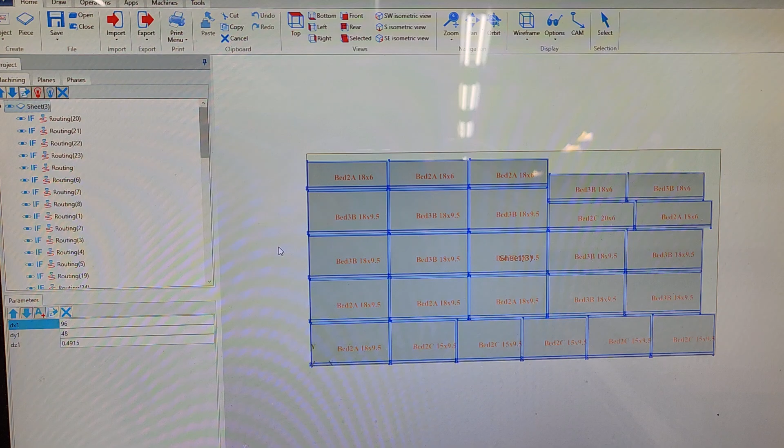Alright, now I will show how to do nesting through Maestro files. This is an example of a nest that I've already made.

So you want to go up here to projects and hit nesting. I don't care to save this, so it'll bring you to this. Now, the way that I know how to do this, there's kind of a lot of steps that are skipped because Brian actually pre-programmed a lot of these things.

But first of all, you have your spoil board thickness. I'm just for now going to show the things that I directly worry about when I'm making these. So you want to put in your spoil board thickness, whatever it may be - it's 0.762. And down here to next.

Here you're going to be talking about your sheet size. Obviously your length, width. Set this thickness to whatever the thickness of all your parts that you're going to be making is. So ours was 0.73, we'll make it that.

This here is how many sheets that you are able to use for this. Now I typically will just put in some large number so that it'll just show me how many sheets I'll need in total. Vertex, low left, that's just starting, your 0 point where the axes are.

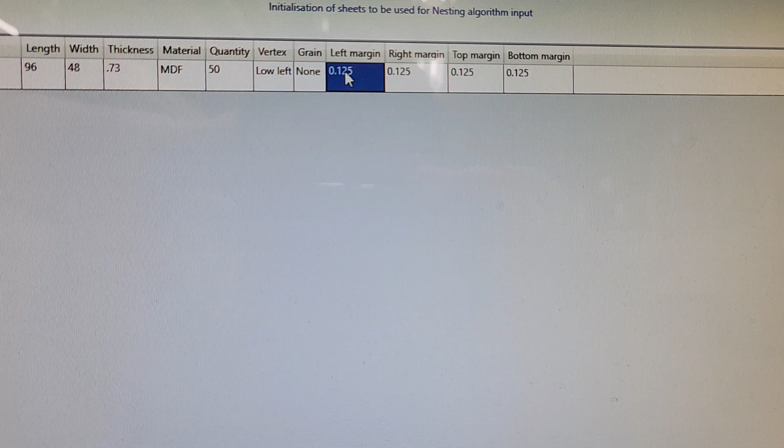This shows how much space you want to have between all of these, the left, the right. And I typically leave this at 1/8.

This is basically the same thing as when you're loading a program in Maestro Active, and you do your X and Y offsets. But this just means that the parts that are being nested will be no closer to the edge - their edge will be no closer to the edge of the sheet than this. So you want to do that. And as far as I know, the material, it doesn't really matter.

Now I hit next again. Go back. Hit next. So now here's where you will actually load the parts.

So, well, I'm actually going to go back because I know that some parts that I was loading were 0.461 in thickness. So I'm just going to put that in for the sake of example.

So you want to go down here and click Programs. And you can either individually just check parts that you made. These were drawer box parts that I made. Well, actually, these are individual nests.

Let me go to bed 2A and into my maple drawer parts folder. So you can select any of these, or you can select and hold the shift key and click the bottom one, and it will highlight all of those parts. So clicking the shift key, I'm hitting the bottom file, and now they're all in there.

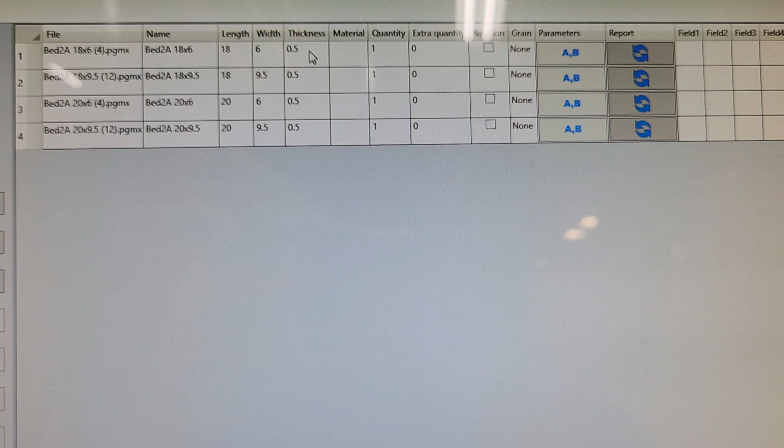Now see, these I actually have at 0.5 thickness, and it's not going to like that because my sheet was 0.461. So I'm going to make all of these 0.461.

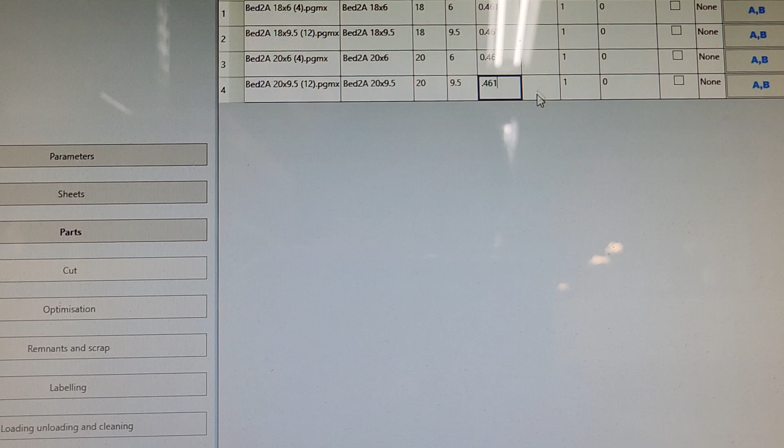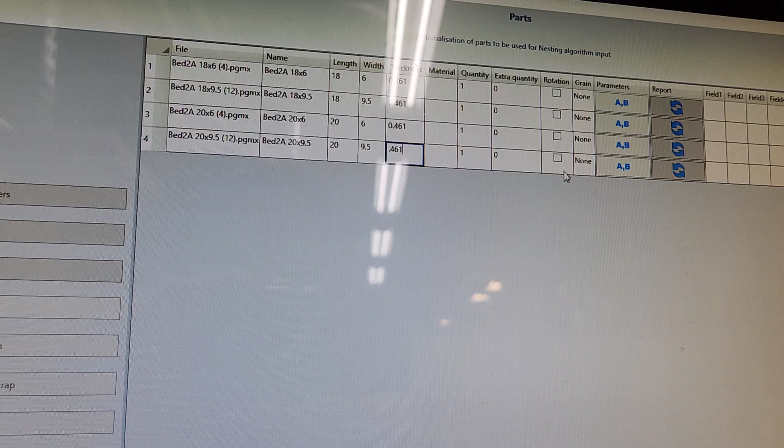Now these were maple, so they have a grain to them. And so I don't want to do this, but if I was using, say, melamine, where it didn't matter the grain direction, I could hit this rotate checkbox, and that would allow the piece to rotate any way that it needs to take up space most efficiently.

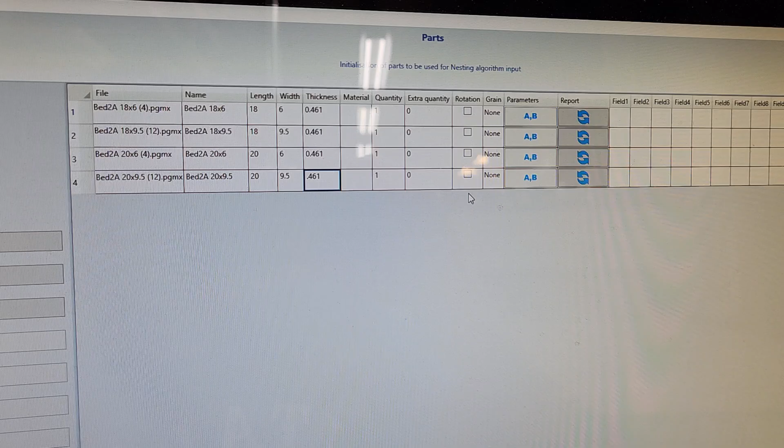But most of the time we'll be working with things with a grain, and when you're programming in Maestro CNC, the grain is typically kept as the X direction. So whatever your long side that you want grain to be along is, you'll make that the X direction.

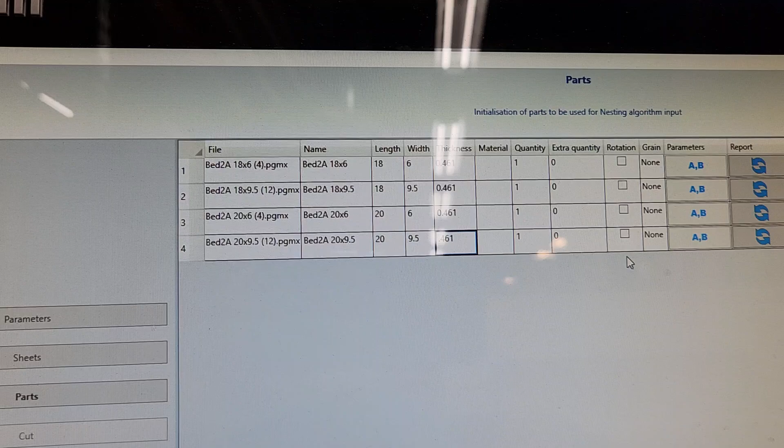So now that this is done, this is what I was talking about, where you can kind of just click next a bunch of times right now, and I'm going through all of these different menus, and I've always gotten by without having to edit any of this. Here we are back at our actual parts list.

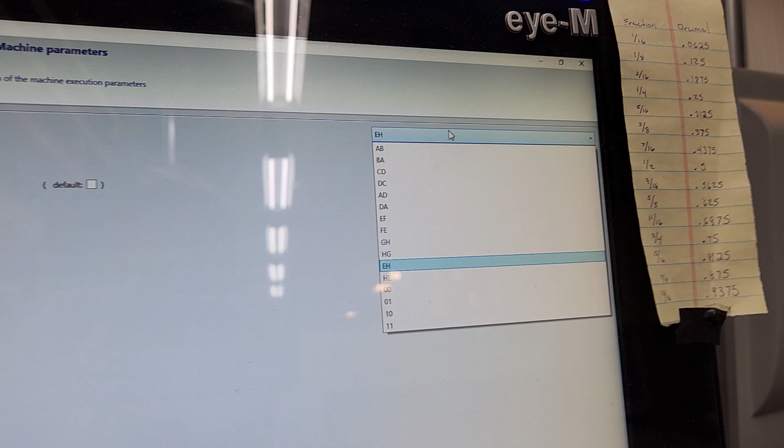Here you can change your work area like we saw in Maestro Active. You'll remember that it came up as HG, but EH will use the entire, basically the entire vacuum table. You can also access the settings such as changing from vacuum devices to a different type of locking.

I unfortunately had to turn the dust collector back on. So that's what that noise was.

But then you just click next until it's grayed out, and then you can hit end. And it will tell you here, oh, this reminds me.

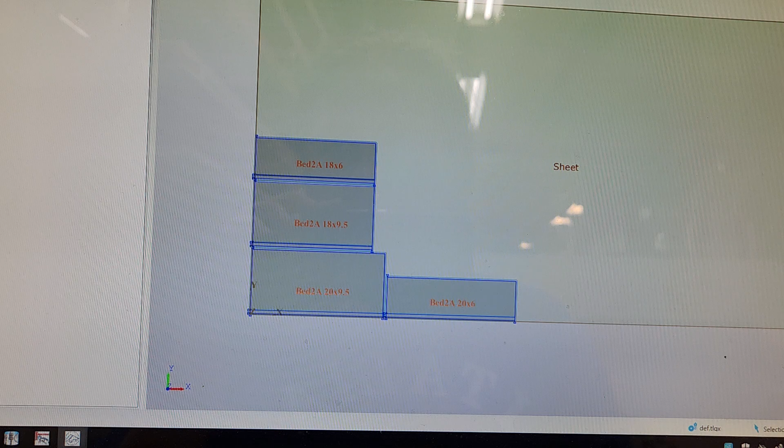Let's do all that again. Go back up to nesting.

And what's nice is that if you have to redo a nest, if you do it again within your same nest file, it will retain everything. So as you can see, our spoil board thickness is still there, and the sheet changes we made are still there.

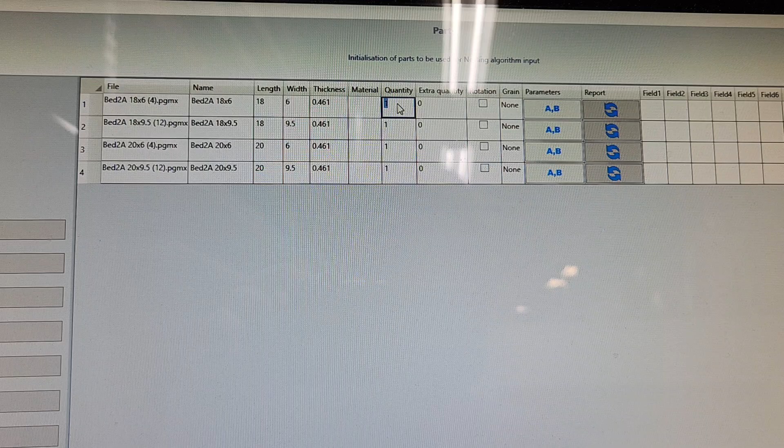I just want to demonstrate that you can do several quantities. So I want 10 of this part, I want 2 of this part, and let's say 20 of this one.

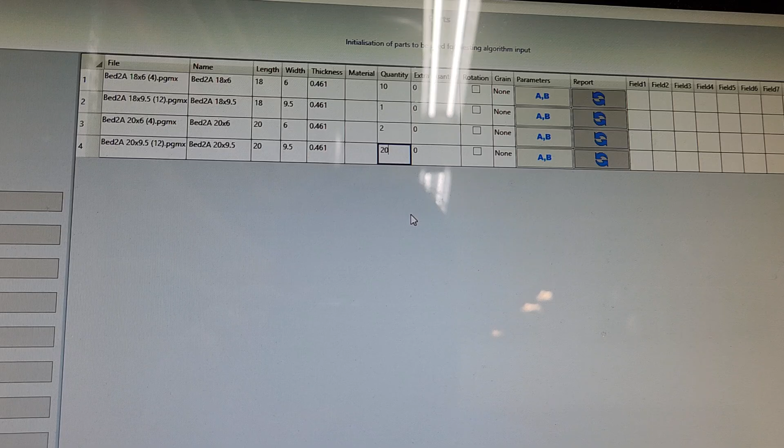Next, next, next, next, next, next, end. It shows that it's successfully nested all of the parts that I wanted. So we can hit close.

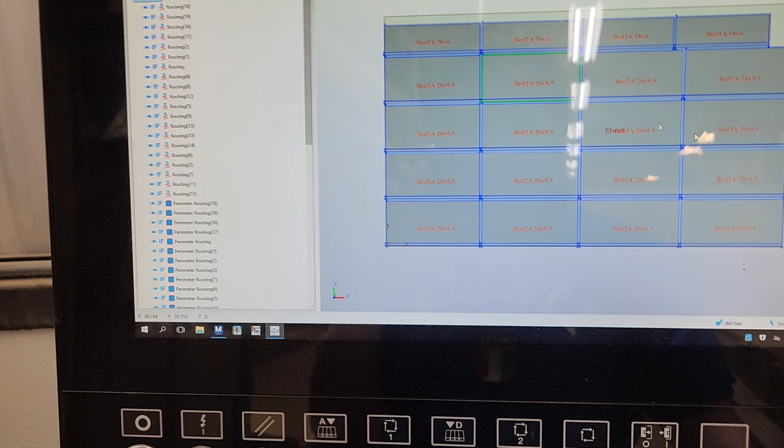And now my nesting file shows up. Here's the first sheet. But if we scroll down here, I had to use more than one sheet. So if I click on any of the routing for this, it's just going to switch to that. If I click on any of the routing for this, it'll switch back.

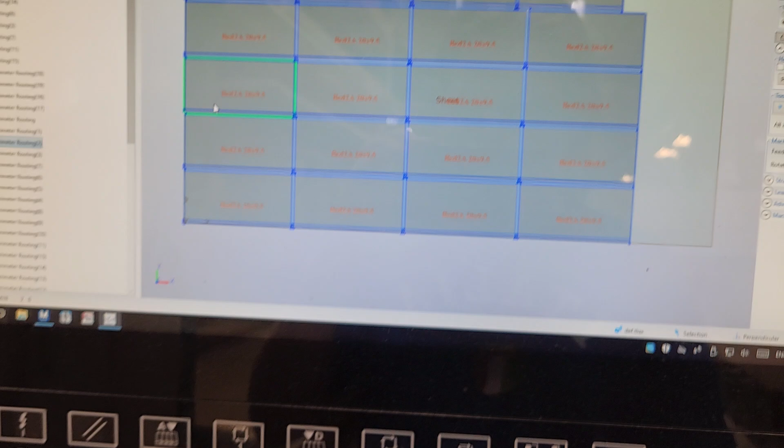A best practice thing that I like to do is, for the movement speed efficiency of the machine, I like to go through and scroll through your routings with this arrow key, so that the machine will route it in a snaking pattern, going this part, this part, this part, this part. You can just select these routings and move them up and down in the process with these arrow keys, so that one will be sooner in the process.

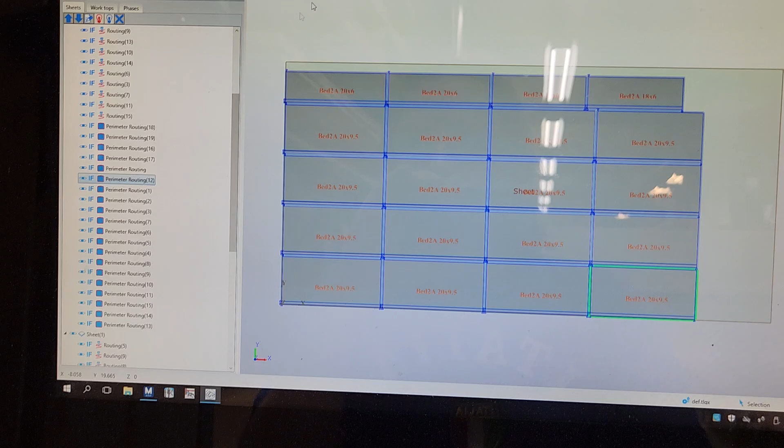Once that's finished, and you've made the edits that you want to, you can go up and, just like an individual part file, save it as a project, and it's going to save it as an NSTX and a mix file.

So let's do this. We'll create a folder called test, and I'll save it there. I'll call it test nest. And we'll save it.

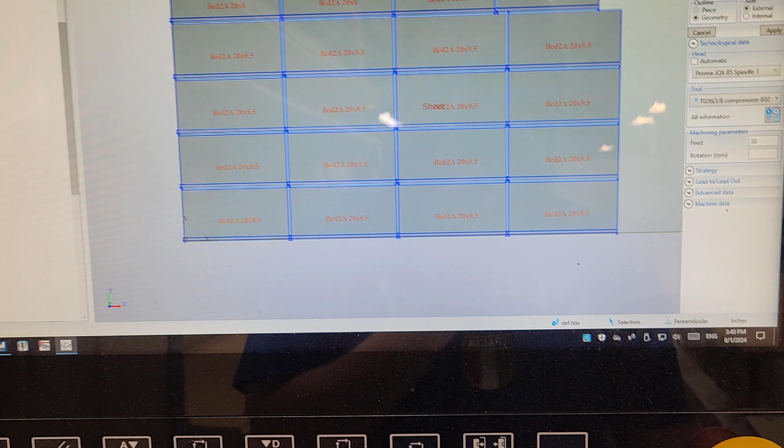Takes a little second. While I'm here, also, as you can see, the names of the parts that you originally gave them in the piece parameters, they show up here. You can go up to options and toggle hide workpiece name, then toggle it back on. This is good for when you want to take your parts off of the table and label them, so you can keep this open as a reference.

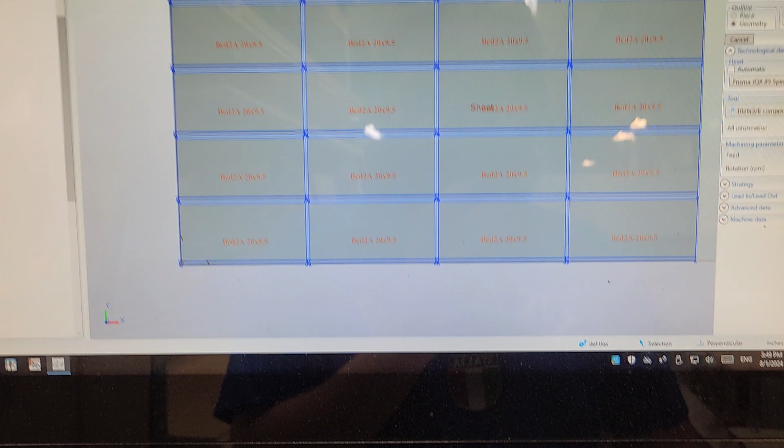But now we'll go back here and load our program that we just made. I'll show you the full file path. Typically I save things on the desktop, and lately we've mainly been working on the model, so I'll scroll down to the model folder right here, and I saved that in Closets V2, Bed 2A. Here it is, test.

Now we have our test nest. This is the first sheet, this is the second sheet. Again, it shows the tools required.

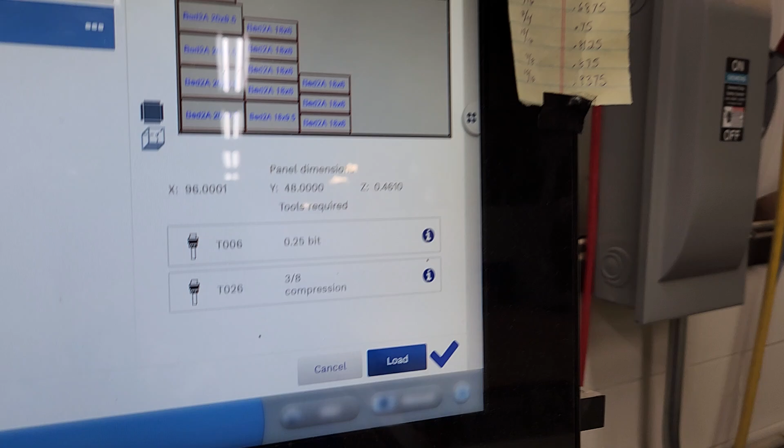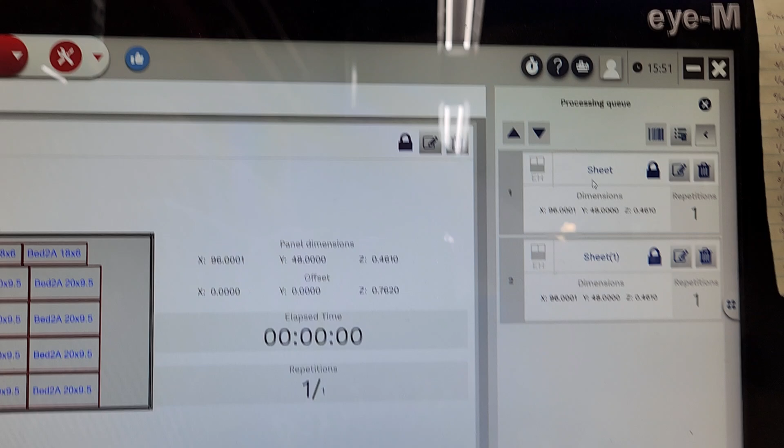But you can also simply load this mix file, and that will actually bring in both of the individual sheets. If you click here, you can show the queue of your sheets. I've got sheet 1, and if I do it like this, I can run this sheet, and as soon as it's done, the next sheet will be ready to go. I can just slap a new sheet of plywood on there and have it start cutting.

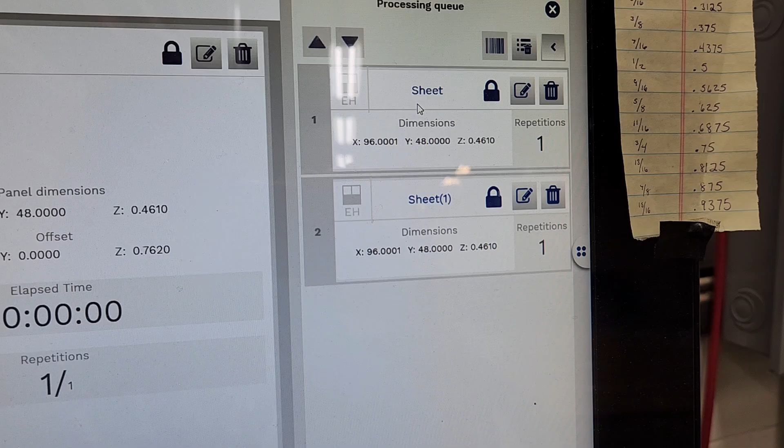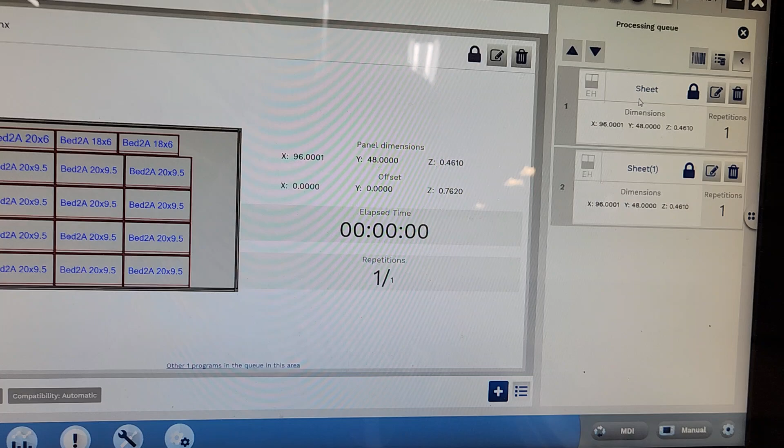Now, these automatically lock once you load them as a mix file, so you can't edit anything about them. You'll notice this is set to 0, but if I zoom in here, because we set those margins, here is the edge of the plywood and here is the edge of the piece. It automatically puts in a 1/8 inch margin already, so you don't need to worry about it.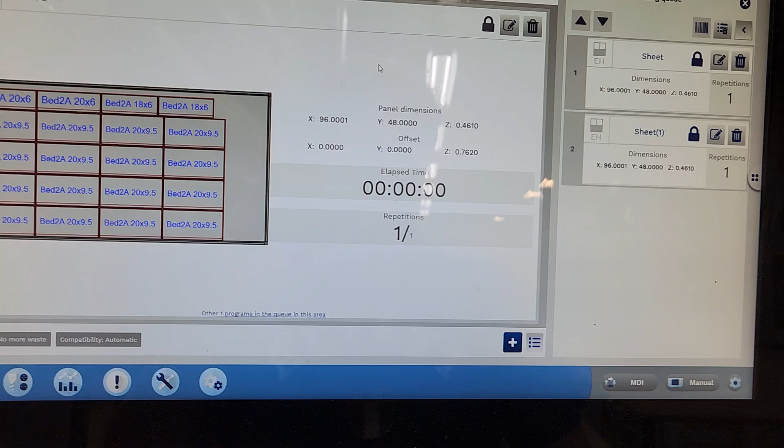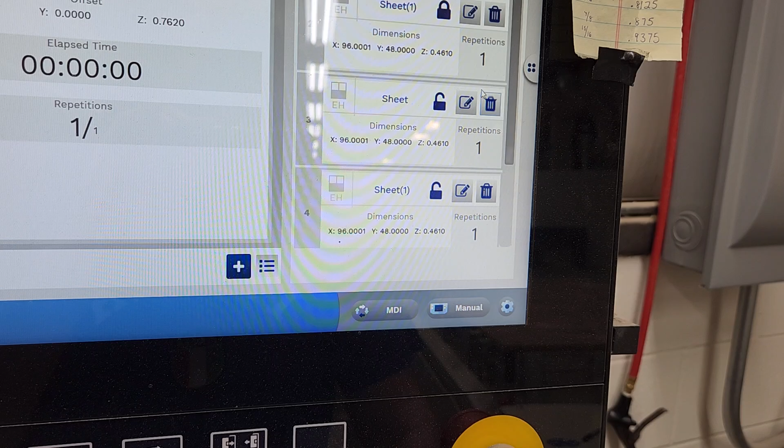Now, an interesting little workaround that I've found is if you want to just edit something about just one of these sheets, you can load the same PGMX file again, and as you can see, these are unlocked. So I could go in and say I wanted to add another inch offset in the Y. Now the full offset in the Y direction would be 1 1/8 inches.

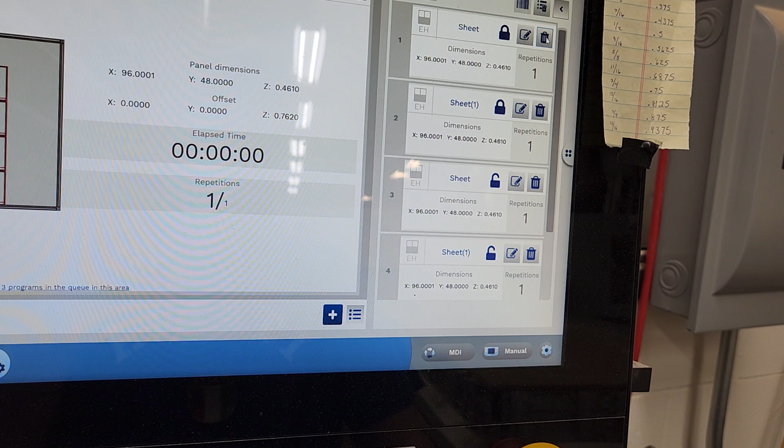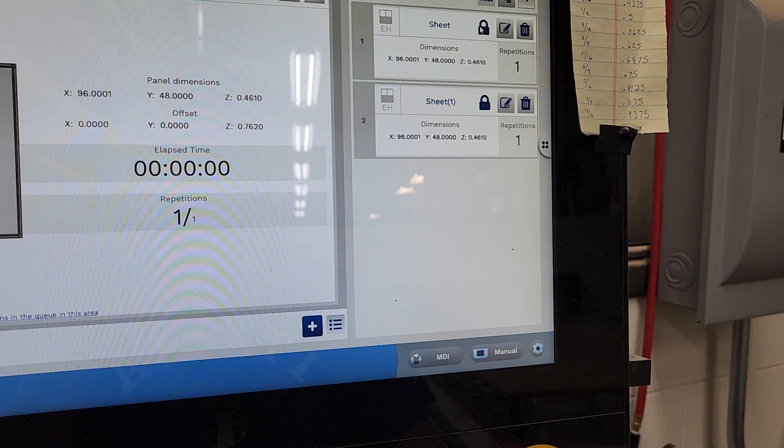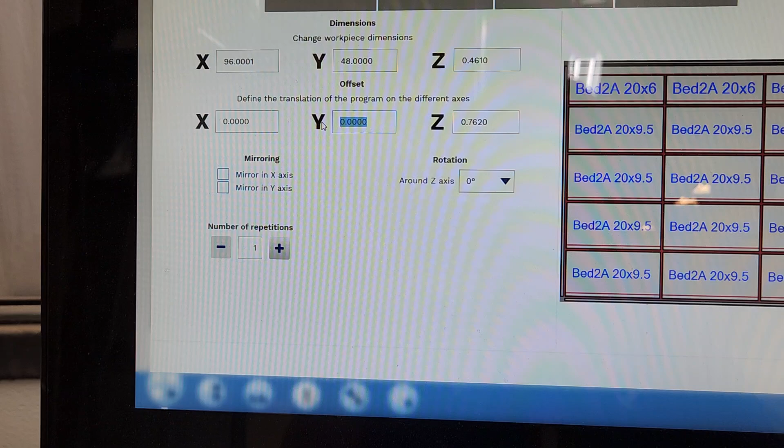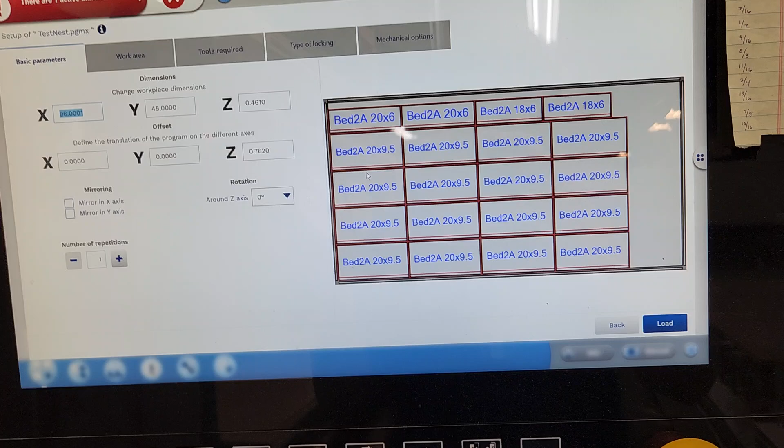So you can do it as a PGMX file there, or you can go into the folder and do the individual sheets. If you do it this way, now you can edit it initially as you bring it in. But if you know that you're not going to need any editing, it's probably better to load the nest file, the PGMX file, so that they're all just right there and you don't have to keep going back to the computer and finding the new files.

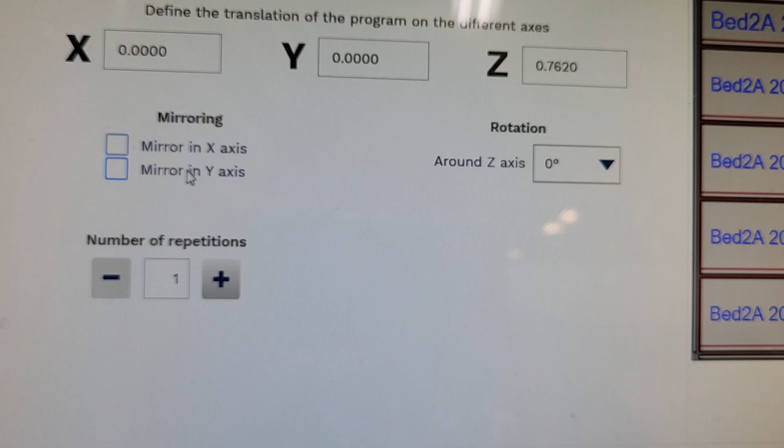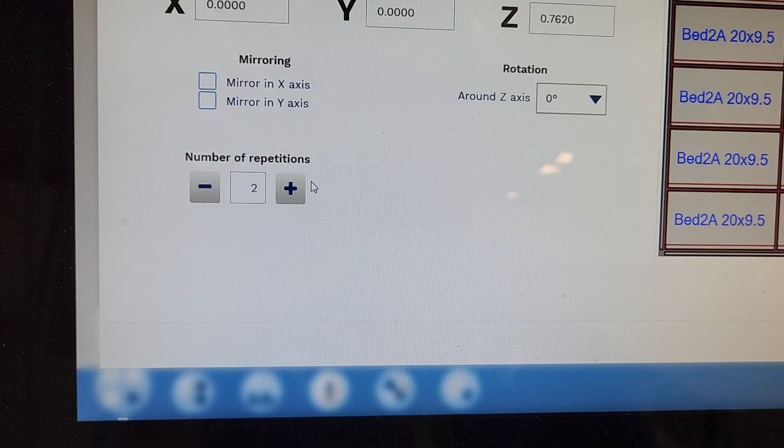And we have some basic things here. You can mirror the whole thing in the X or Y direction, you can rotate it around the Z-axis, or you can do repetitions. So if you know that you're just going to need 2 of all these parts, you do that, you run it, and it'll automatically just load the same thing again.